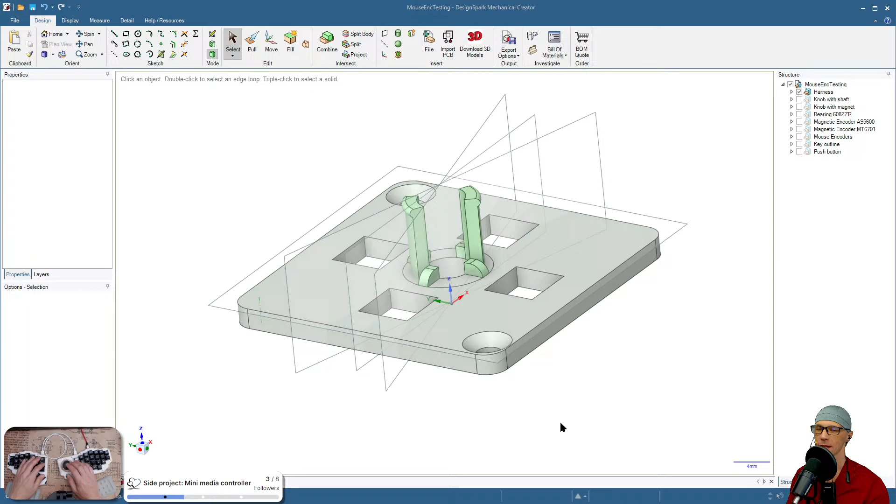Welcome everyone. I think it's gonna be kind of a tradition already, where I give you an off-stream update on what I did when I was offline.

Recently we've been working on this harness for the encoder. It looks more or less like this. Let me bring it back for you. Like the knob, and we have the bearing as well, and at the bottom we have push buttons. The bearing is transparent right now, but that shouldn't be a problem. So what we've been trying to do was find a way to be able to push those buttons with the knob.

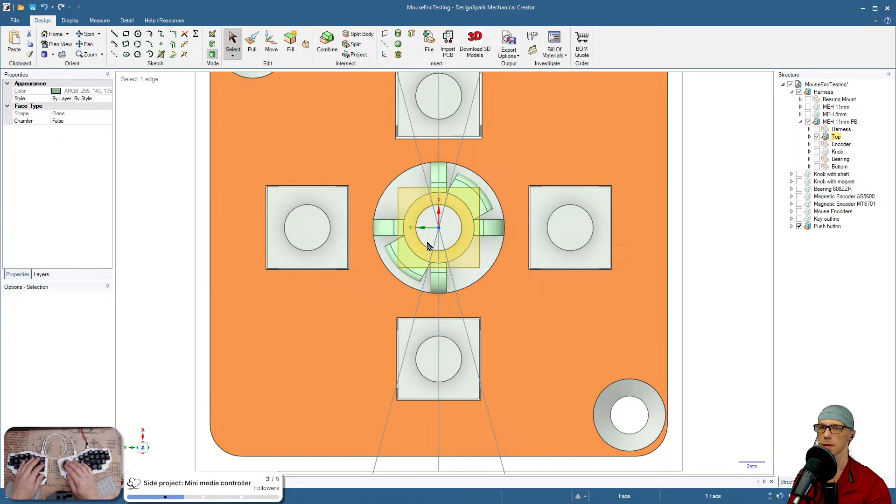Recently it didn't really work too well for us, and it's still not great, I would say. But I managed to find an okay solution. The solution is that I changed these, because before they were straight, so now I did a round edge. They are very, very small at this moment. And I also stuck to, I think, 45 degrees rotation for this part that is actually holding the bearing for us.

Maybe I can change the color of the bearing too. So don't get confused that they are a bit lower, eating into the bearing, because it turned out that this edge on the bearing, which I can change a little, is a little bit round. Maybe more like this. Something like this. I think I'll leave it like that, and I can show you later on the workbench.

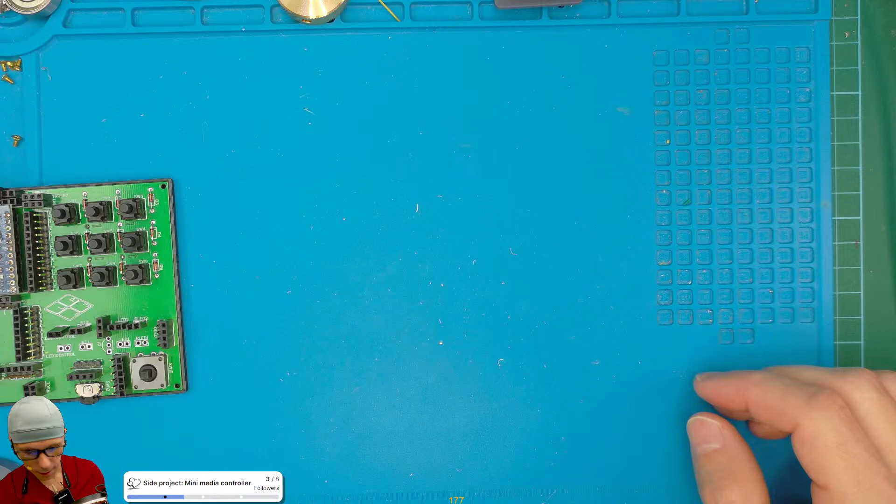So more or less, this is how it looks like now. And if we jump to the workbench, yeah, I have it over here. This is the current design so far.

So if we can manage to cram in the 5mm encoder, which is this one - so tiny I can't even see what's the size on it. Yeah, I guess this one is 5. I don't think I have any... oh no, this one is 5. Yeah, these are 5mm. So I think we can cram this one inside, and then we'll be able to use the 4th button.

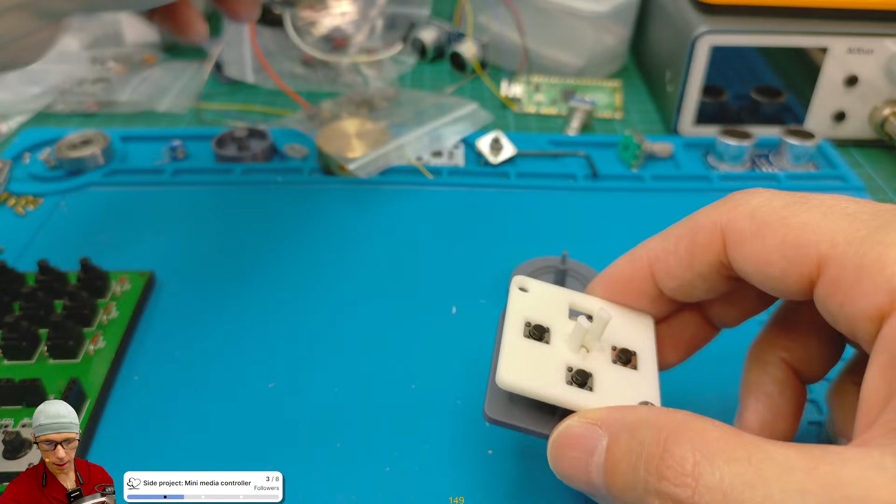Currently this kind of works, kind of doesn't. If I put it inside, I believe the issue is that the 4th button is missing over here. So it's not that good to press, but we can press it like that.

I'm not quite sure if you can hear. No, you can't hear it. So the click is not that audible. I think it's because of the encoder, but the encoder is rotating smoothly, so it's not really being held by those keys, by those switches underneath. And if we have it flat on the table, there isn't that much tactile feedback when pressing, but it's definitely pressing.

So I think we can finish this design maybe today. We can try to fit in the small encoder, add one more button, and then try to print it, and then we can see how it works. And we can save it for later, because there is one more design that I wanted to try.

I wanted to put the switch underneath the encoder, so then we'll be pressing the whole thing, the knob, together with the encoder. But that might be troublesome because it's going to be very difficult to push it with the bearing inside. So we either need a mechanism to allow the whole thing, the knob and the bearing, to be able to be pressed a little.

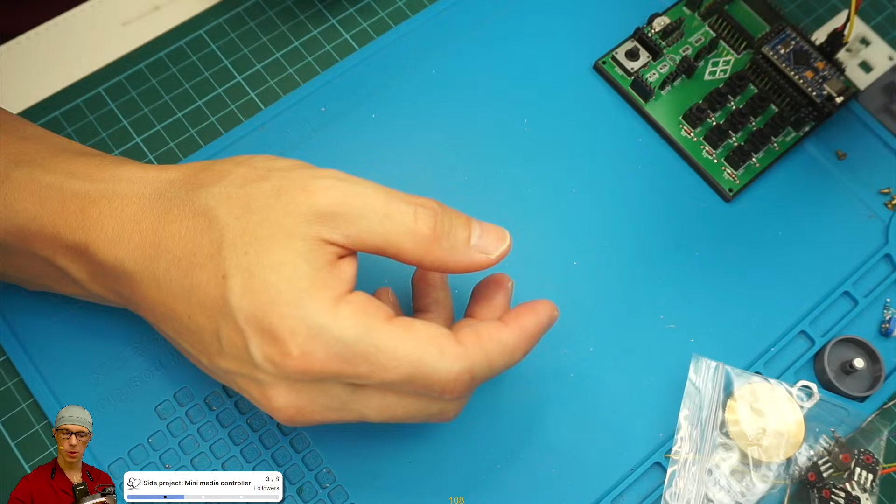On the last stream, we were trying this contraption to check how these encoders really behave in a real world scenario, like if you want to use it in a keyboard. Initially I was having issues because when going one way, either clockwise or counterclockwise, occasionally it would pick up a different key. So I changed it to output A and B when turning, and I could see a stream of A's and then occasionally a letter B. It was my fault, of course, as usual. I am the one to be blamed for this issue.

It turned out that the resolution in QMK for the encoder, you can't really change it lower to get more responses per detent. I was thinking if I change the resolution to 1, I should get an output every detent - every time I can feel the detent click, I should get an output - but that's not the case, sadly.

So we have to switch it to 4. I can show you the code.

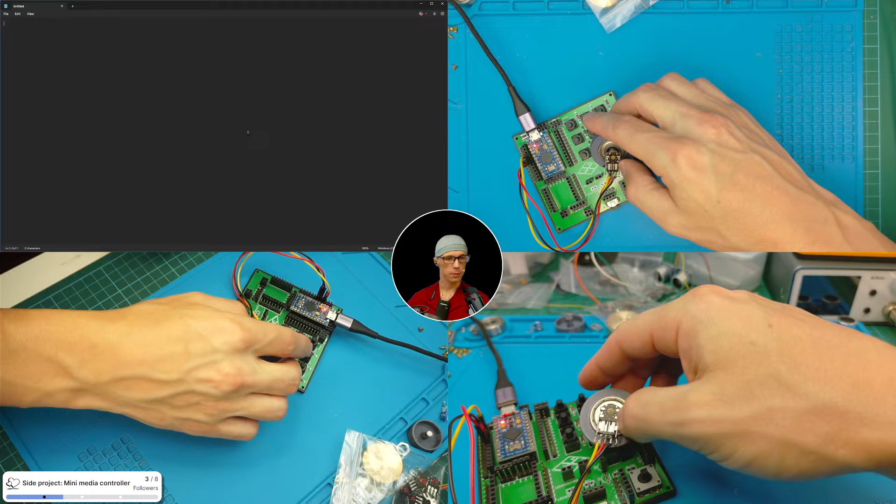Okay, so there we go. As you can see, with the resolution of 4, I have very clear output - just letter A's. Not sure if you can see it. Maybe a quick jump to...

Yeah, so as you can see, it's very nice, very responsive. But of course I don't like it like that, because there's quite a number of detents that I can feel it moved before I can see the output. So it should be 1, 2, 3, yeah, more or less 4.

Let's see when we have the output. Okay, so this is - we have B now, so it's gonna be 1, 2, 3, 4. Yeah, so I would rather have it respond to every click on the encoder.

And I actually have this done, because on all of my keyboards I am not using the default implementation from QMK regarding the encoders. I do my own reading from the pins and decoding. So I think this should work.

So first thing first, today I'm gonna dismantle one of my early prototypes. I wanted to dismantle it a long time ago after we built the keyboard on the previous stream, but then I thought maybe I should just leave it, might come in handy. And today is the day when it will actually come in handy.

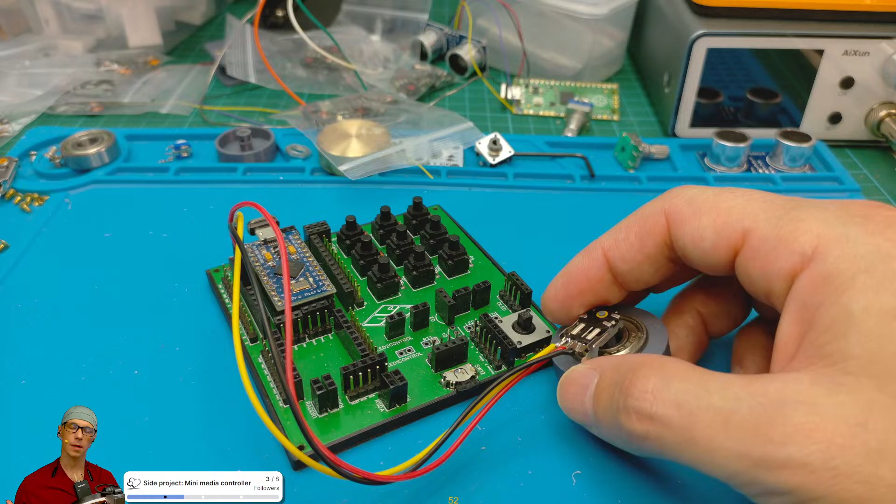So I'm gonna hook up this encoder to my old prototype, because I think the function running there that is decoding the encoder input is actually...

Okay, now I see there is some buffering error on YouTube. Oh, that is odd. Let's take a look at what's happening. Okay, that is very, very odd - I never had that before. It doesn't look like my PC is too busy with buffering. Okay, let me do a quick check if we have any output on YouTube. One more second.

Okay, seems like it's working. I'm not quite sure what's happening. What does it want from me this time?

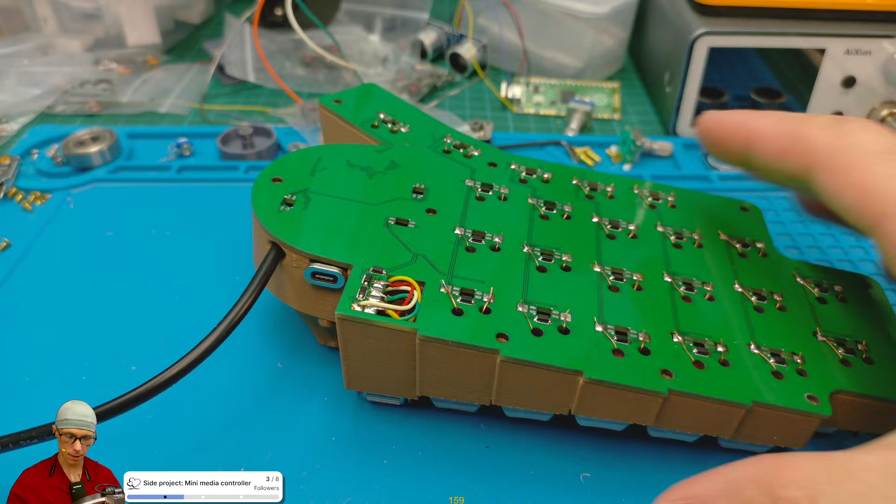So these two pins on the bottom, this is the switch, so we can skip these two. And then we have A, B, and C, and I think the last one is the common one. So we can connect the common one to our blue one, but okay, I think I will need to prepare some new wires for it.

Because over here I have these. Oh, these are good for the pin headers, and I don't really want to spoil them with solder. So yeah, let's remove this.

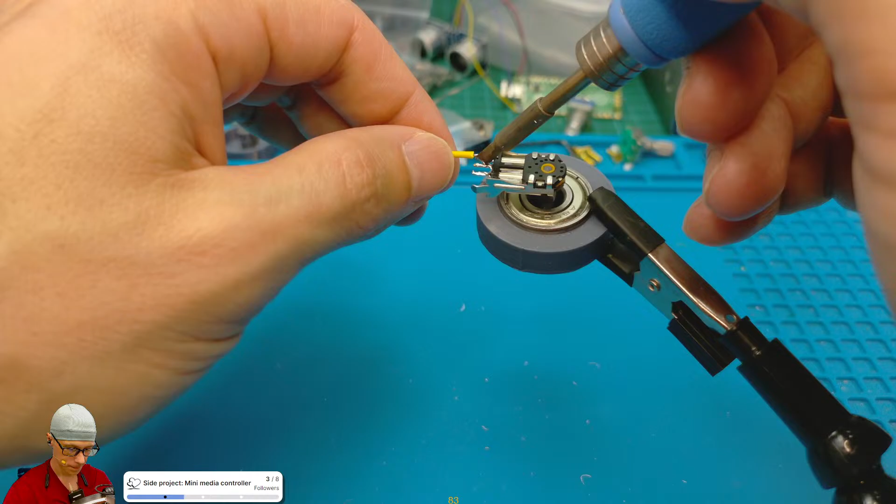At first it was difficult to solder them in, and now it's difficult to remove them. Okay, we have one off. Second one. Okay, so I need 3 wires.

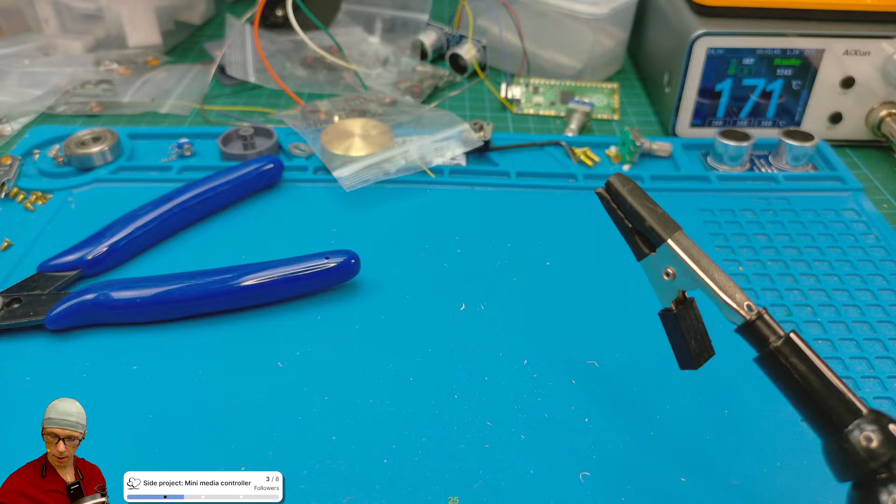So we have 2 and one more. Let's go with the orange one. Okay, let me just quickly strip them. Okay, the question is, aren't they too long a little? Yeah, maybe this one, let's trim it.

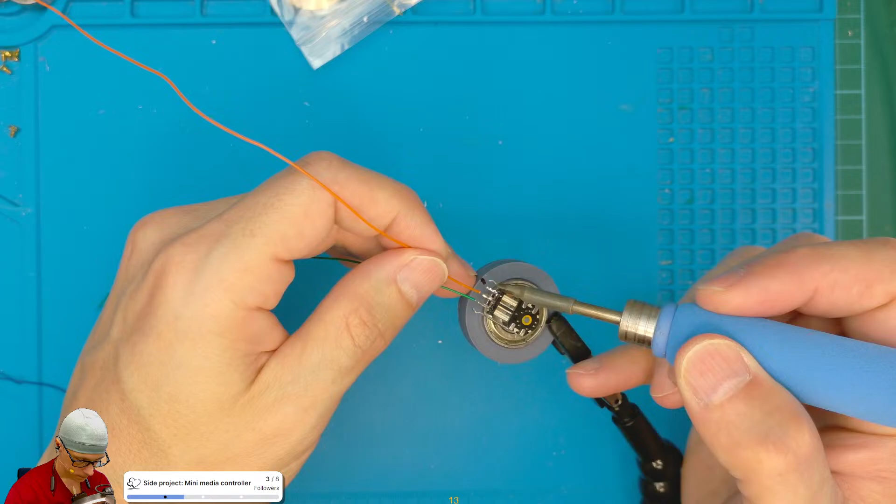Okay, so going back to our encoder, let's attach those wires. And one more left.

I hope it's gonna work the way I'm expecting it to. Okay, this one is too long.

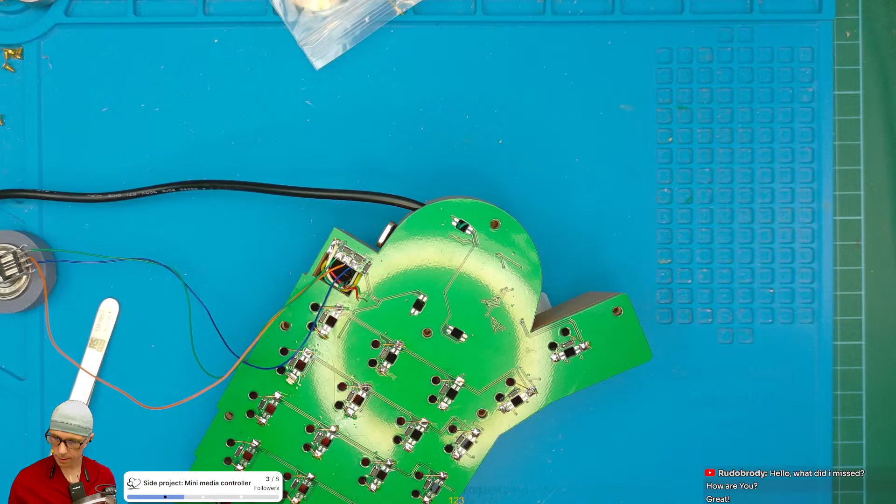And one more. Alrighty. Okay, so I think we can try to plug it in and shut down the stream, or maybe not. Let me clean this up. Well, anyways, we're gonna be scrolling, so I need a page.

I think we can use our favorite page for scrolling, which is QMK, all the key code list. That is kind of long. Okay, we might not be able to see if we have jumps, but most probably we won't. Okay, let's just plug it in. I can't wait to see what happens.

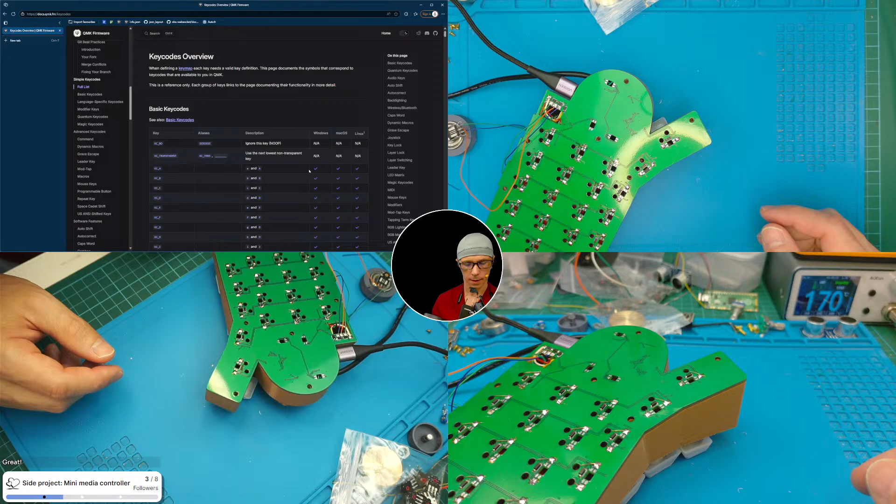Okay, stream is still on. Okay, what do we have here? Oh no, actually, it behaves the same way. So I thought I had it a different way, but still, yeah, it looks like it's every 4. 1, 2, 3, 4. Okay, so looks like I'm not doing it any different.

Okay, let's take a look at the source code. I think I should get a new window for that. Well, at least we know it's working. Oh no, it's the same source. Okay, I got it wrong as usual. Anyways, we have our matrix over here.

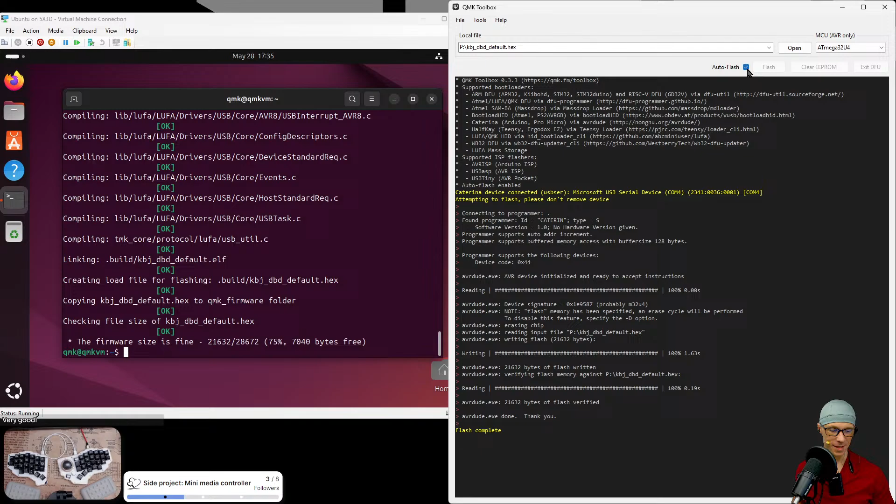It's good to have Bootmagic working, as you can see. Yeah, okay, so it's changed already. So now we have our resolution of 1. And let's take a look how it's gonna behave.

Okay, now I have a response with every step, but I don't trust it that much. I think we should change it instead of just rotate, instead of scrolling. I think I will just output A and B, and then we will have a definitive answer if it's really working, or if we have any rogue letters in our output.

So it would seem that my implementation is a little bit different. So if I change the resolution to 1, I get an output with every step. Although I don't know if it's the correct one, but it works, so I'm okay with that. At least it looks like it's working. Okay, let's take a look.

Where do I have the... I need to find my scroll.

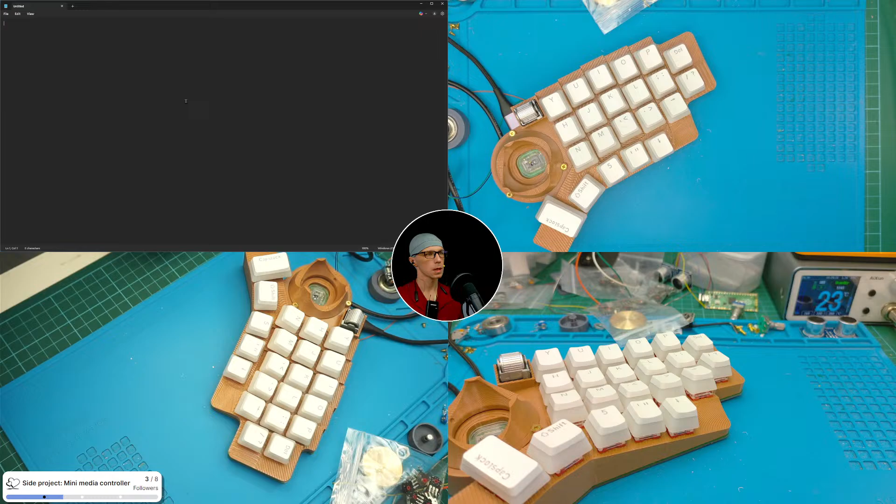I think we can go back to... can I make it bigger, maybe? Okay, doesn't look like it's zooming too much. Okay, so let's take a look. What happens now?

Yeah, perfect. So we have a clean output and no missed steps. Oh no, actually going backwards. Okay, I think it lost. Okay, it was working for a while.

Okay, it just desoldered. Okay, so that is fine. Everything is under control. Almost under control.

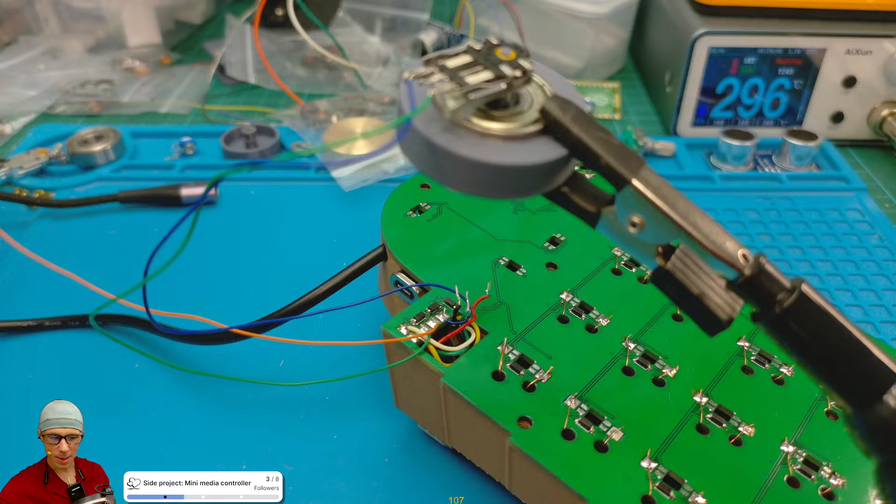So, when I noticed that we have like AB, AB, AB, I was like, oh shit, it's not working. But then I realized that the wire just detached. Maybe we can give it some more juice to hold on to.

I think it's a little bit too long. I will just trim it a little. This wire is like sticking out quite a lot.

Okay, now it should hold, at least for a while. Oh, I also detached it from the keyboard itself. Oh wow, that is actually a disaster, to be honest.

At first I was thinking yesterday maybe I should just use Chordie, or just copy some code from Chordie to be able to check, but then it was already too late to do this much. And then I realized I don't need to really copy anything. I can use my old keyboard for that. Just swap the encoder for this one, like so, and then we can play with it without putting too much effort.

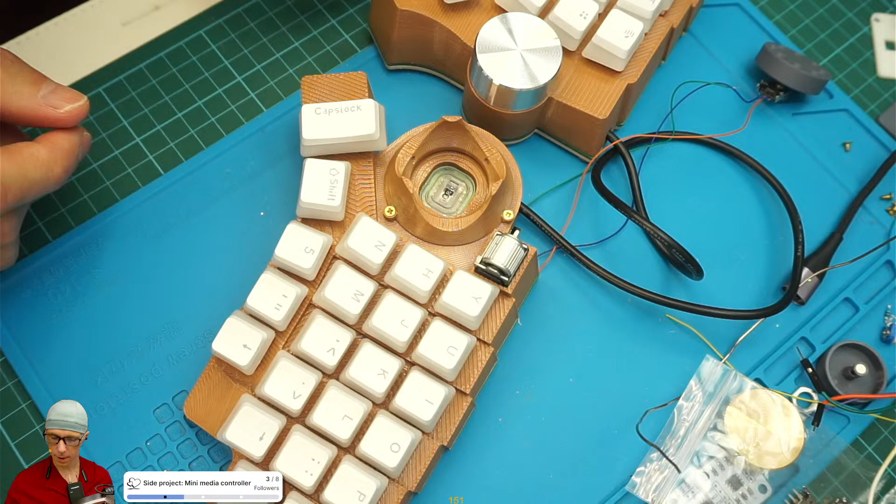As you can see, it's very messy. I can't really have it upside down because it would be pressing some other keys. Yeah. And I think I need to have it like this. Okay, are we still on the... okay, let's do a split, or maybe...

Shit, another cable just disconnected. Holy, damn it. That is really sloppy soldering, it would seem so.

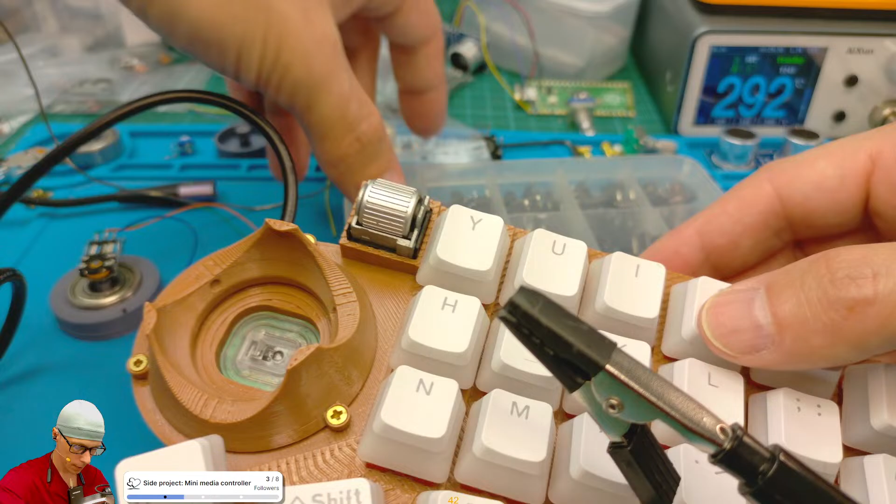Okay, I hope that it will hold this time. Okay, I guess we are on.

Okay, so it's not all sunshine and rainbows because... oh, so no. Okay, now it's okay. I don't really know if there are some wires touching or what.

So if I go too fast, it will kind of lose. Okay, well, I guess we are bound to... let's change it to 4. Let's see what happens if we are on resolution 4. So maybe my implementation is not that much different. Where are we? Over here.

Can we pull them up now somehow? Technically we could. I do have some resistors and we can just plug them in... that might be tricky actually. Okay, give me a sec, I will just grab the resistors. Yeah, I think I can remove that for now.

Okay, so we need 5K. That's gonna take a while. Oh, we have 5.1. Okay, that's good enough.

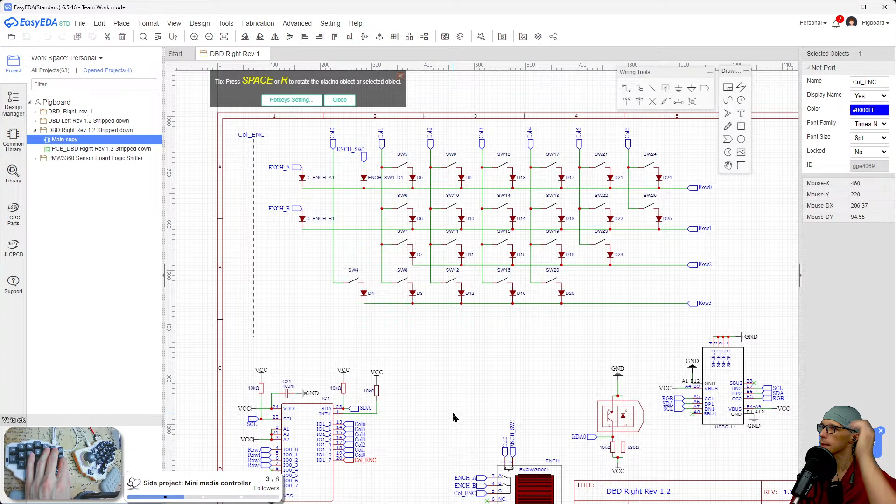So this won't really help us pulling those up. There's no point because they are most probably up already, or maybe down. And I think the column goes up. And where do we have the switch actually? Oh yeah, okay, so it's being read from the row. So that's not gonna help.

So I guess we are stuck with this for now. Well, at least we know it works. So that was a waste of time looking for those resistors. Okay, one more test before we go.

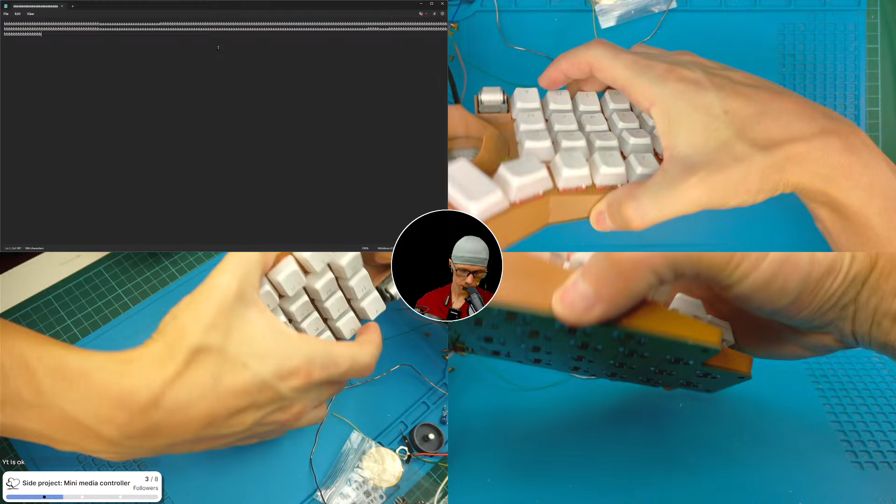Okay, now it stopped working. Okay, so one key is missing. I mean, one wire.

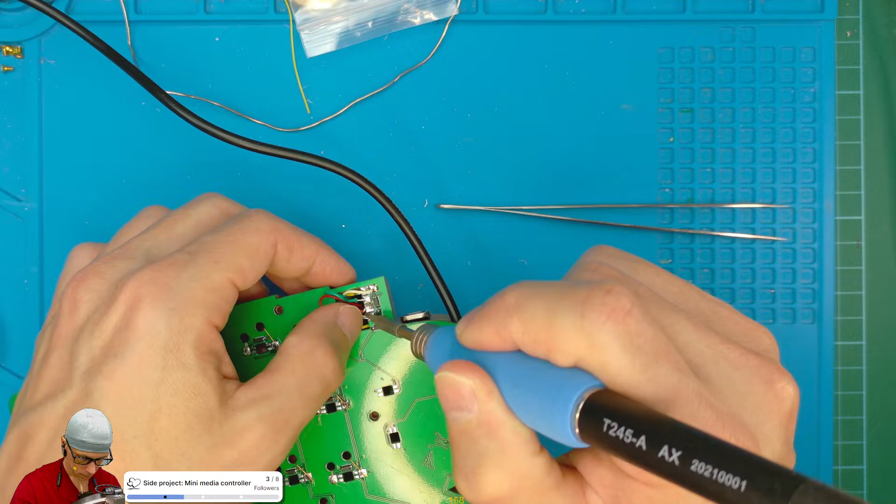Okay, we have it back. Maybe I should try if it even works. I'm under the impression that if I connect this keyboard, then it starts complaining. I mean, the YouTube starts complaining.

And I got it wrong. Of course I got it wrong. So we have only one way rotation. Okay, red is at the bottom. Okay, so I need to swap these two, three wires, and I can't even remember how to put them. But I guess it's not only my issue.

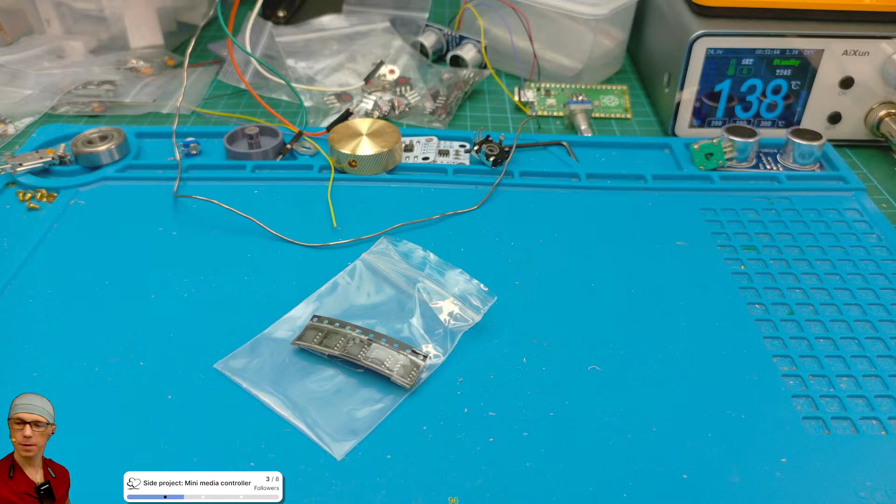Okay, going back, I also received one of those magnetic encoders I was talking about. I think the name is MT6701. I was expecting them to be a little bit bigger, maybe to hand wire, because from what I remember, if we can take a look at the schematic... 6701. Do we have a data sheet somewhere for this thing?

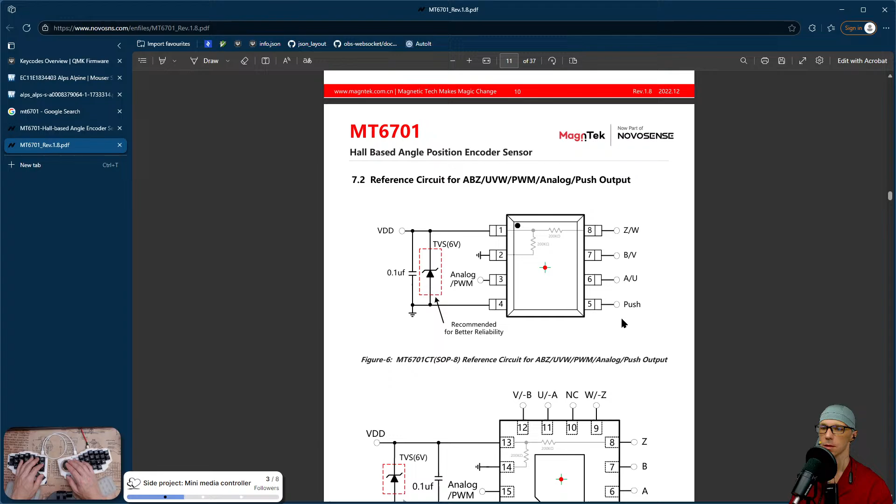Oh yes, there is. So this one had the output I was very interested in, which was ABZ. Okay, this one. Actually it has two types of outputs, ABZ and UVW. So looking at the schematic, how to make it work, we only need a capacitor, but I was thinking maybe we can skip it. This diode is only recommended, so we're not gonna bother with it since it's only recommended.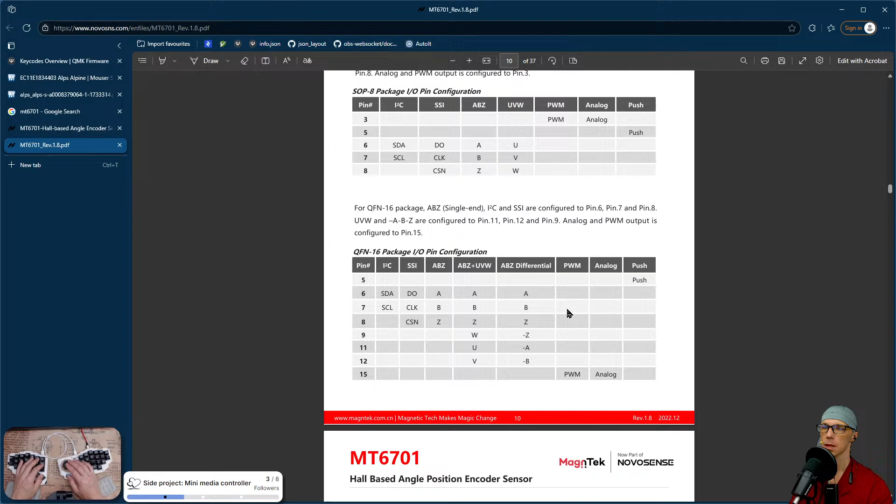Yeah, but I was looking at this and it looks kind of normal. So we would be interested in A and B output. And I was curious, can we really read anything out of it just by trying to read those two inputs, without any configuration or anything? So which are the outputs? 6, 7 - actually we are interested in 6 and 7 only. Okay, so that will be this one, these two.

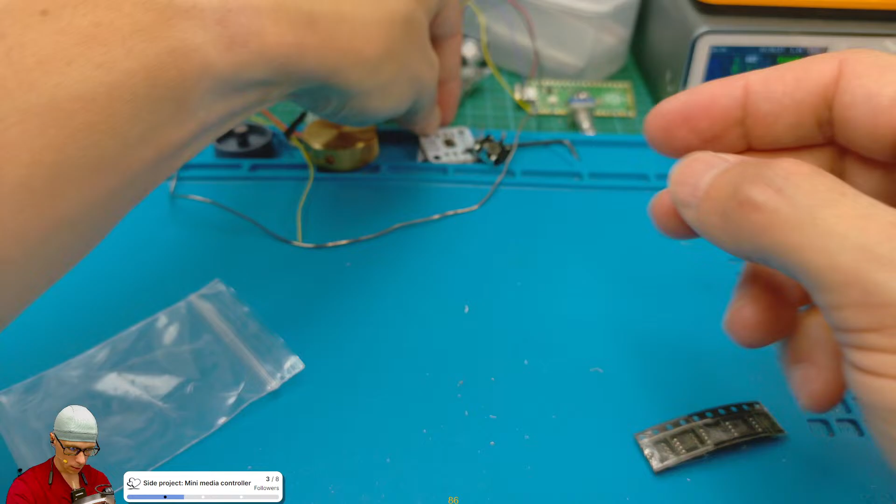Yeah, but I think it's gonna be very difficult to solder by hand, because it's so tiny. I guess we have to wait, because I also have the same chip but on a PCB, something like this, but with a different chip. So I think we will wait for that. This one maybe we can try - if we happen to know it really works, then maybe we can try to squeeze it into our horizontal encoder later on. If we can hand wire it, it's gonna be super difficult most probably. If it had just a little bit bigger package - I think this one is SOIC8 - if it was just a little bit bigger, like the encoders we had before, it might have been a little bit better.

Okay, so what is left today to do? We can either try to remodel this one, so we can fit a 5mm encoder inside. And we can also try... okay, where was it? Okay, I have the encoders over here. Oh, they're also small. Which one is smaller? Okay, this one seems to be smaller. Is there any? Okay, this one is 7, and I think this one is 5. Yeah, these are 5. So I think we'll try to redesign this so we can fit in one more push button over here, with this encoder, and see if it works. And then we can also focus on trying to make it work if we put the push button underneath over here, so then we can have only one button, but that will be kind of enough.

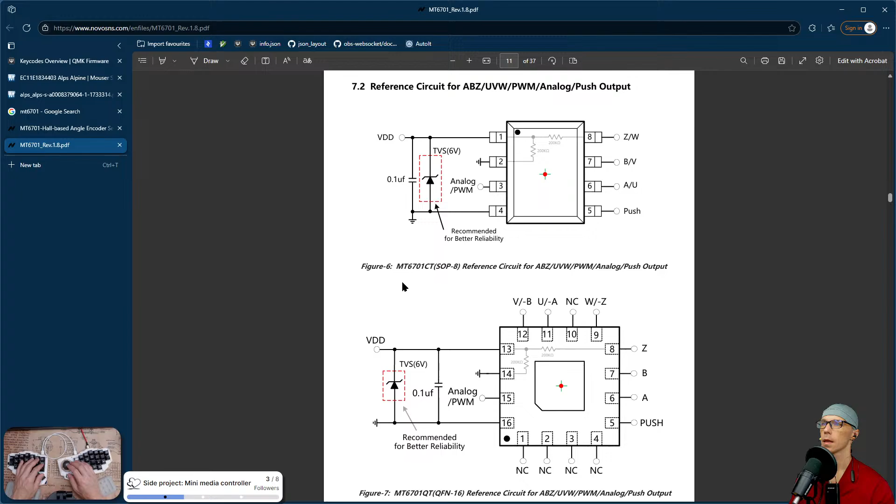Okay, so I guess we can jump into the CAD for now. Or can we? Let's do some cleanup on the desktop.

Oh, I forgot to reprogram it, so instead of scrolling, I'll have A and B still. But that's fine, I don't think I'll be using it anyway anytime soon, so I guess I can just close that.

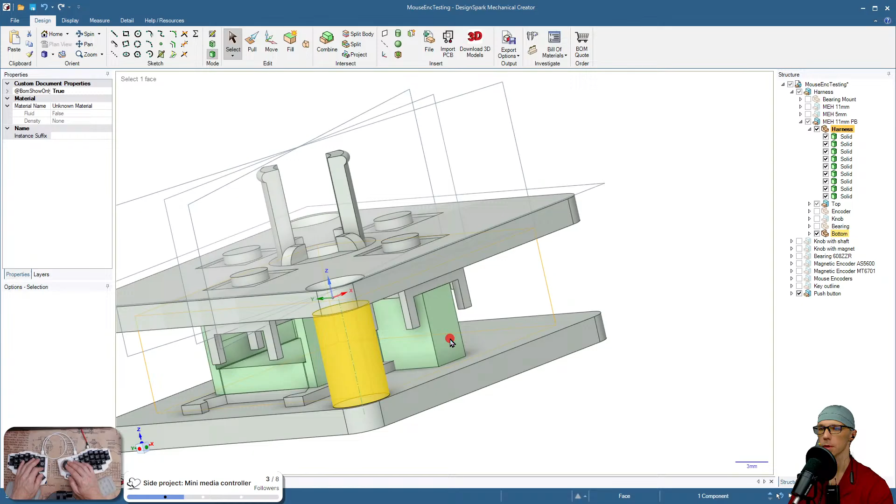Okay, so where were we? So this is our bottom part. Let's make it more colorful. Okay, so we'll be working on this part, on harness. So what I need is one more support. I think I should.

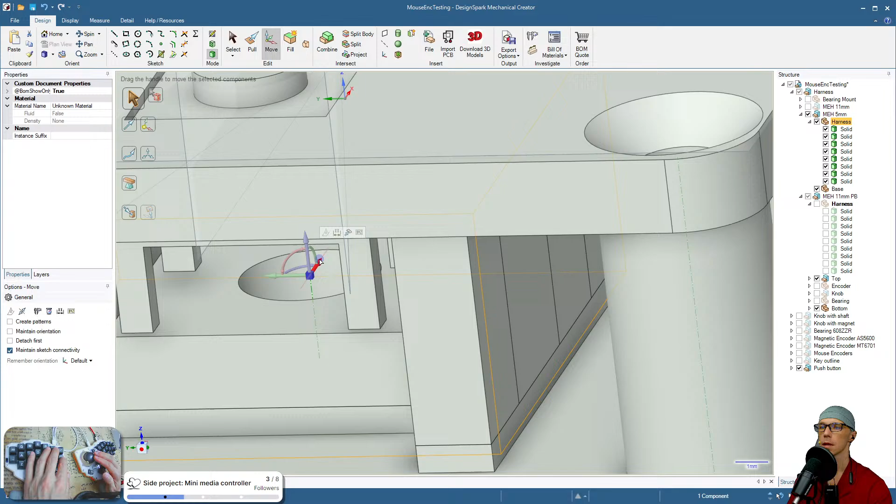Okay, let's take a look, because I see that we have something done over here. Okay, looks like we have something done. Okay, so if I can just move it and align the hole from here to the top. One more try - so like this, and I want to align. Okay, looks like we should have enough space. It looks like it's aligned. Let's take a look. Yeah. Okay, seems fine. Most probably it's not fine, but that's fine.

Okay, so let's take a look. Let's just remove the top from here. Okay, so this push button is over here. This part, I think I can hide it. Okay. So I should either pull this to here.

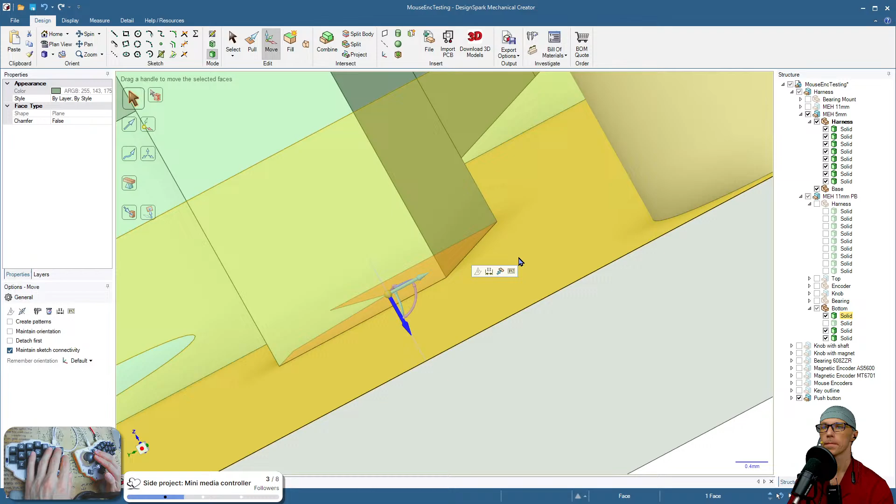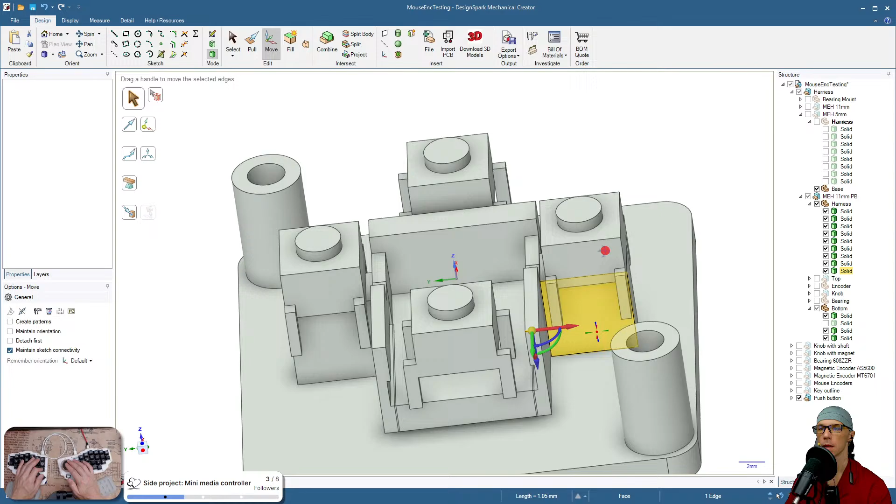Okay. So looks fine, but these walls are kind of too thick. If I can compare with this one, okay, so we can make them smaller. I see this one is still kind of - I left it very thick. What's the thickness of this? 1.05 - oh, that's kind of low. Yeah, but it holds anyway. So let's make this one the same, 1.05. And let's move this over here closer. So this is like a spot that the push button is resting on.

Okay, and I guess this is just one more wall left for us.

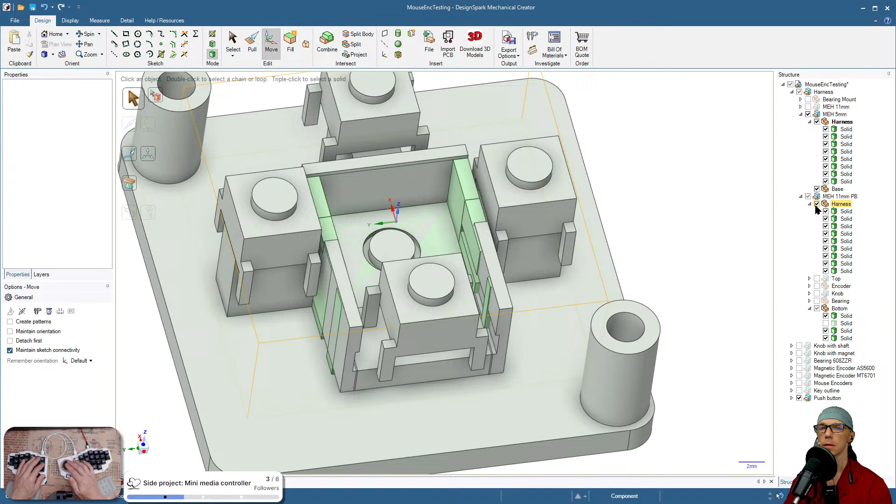So, okay. We went a little bit too short. Oh, that is fine actually. We don't really need those because I think we're still gonna have to chop off the legs from the encoder anyway.

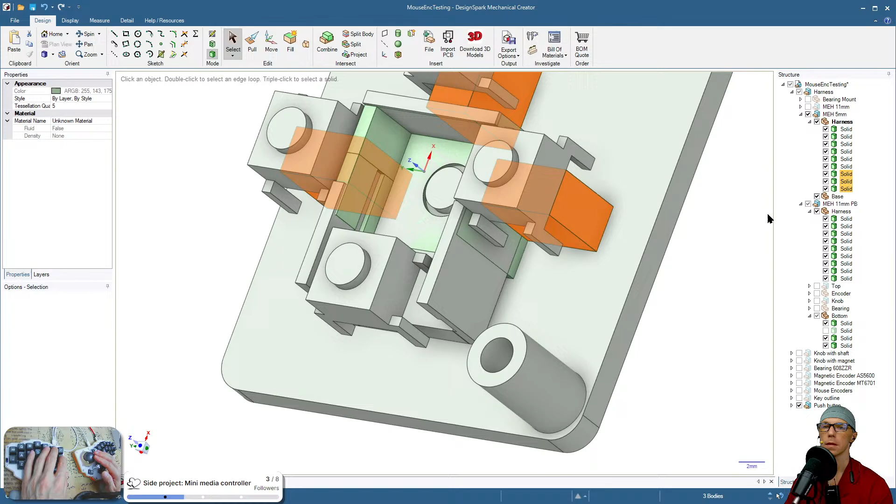Okay, so I will just borrow these four, so we don't have to use this one when we are printing. And...

Like this, I will copy and paste this one, and then I can rotate it around the center, like so. So if I make it 90, okay, minus 90.

Okay, is it in the center of this switch? We can quickly check. Yeah, it looks like it's in the center.

I think I will leave some space over here. Let's take a look at the... Do we have an encoder prepared somewhere that is 5 millimeters? Do we have a mock-up anywhere? Yeah, we do. Okay, if I can move it.

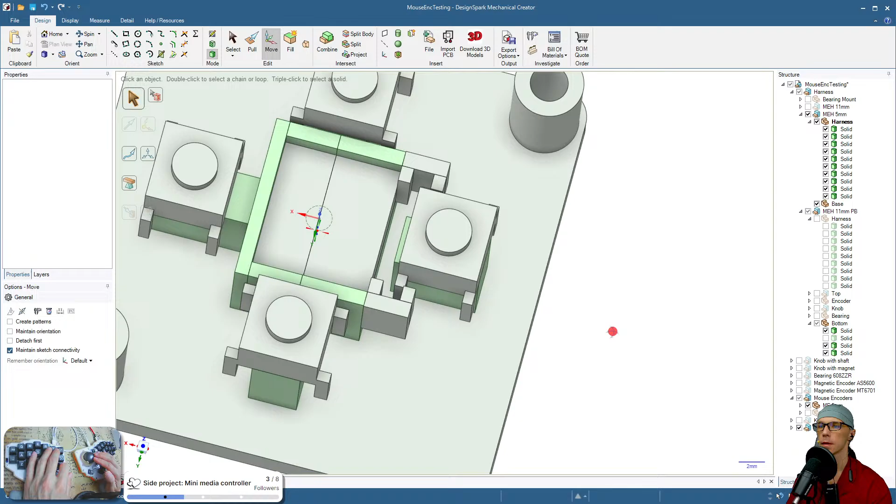Okay, there is a slight chance that if we chop off the legs, it might fit.

Okay, so for the 5 millimeters, we still need to... or maybe I will just borrow the top from this one. Oh, there's too many. Okay, we need only this one and the top itself.

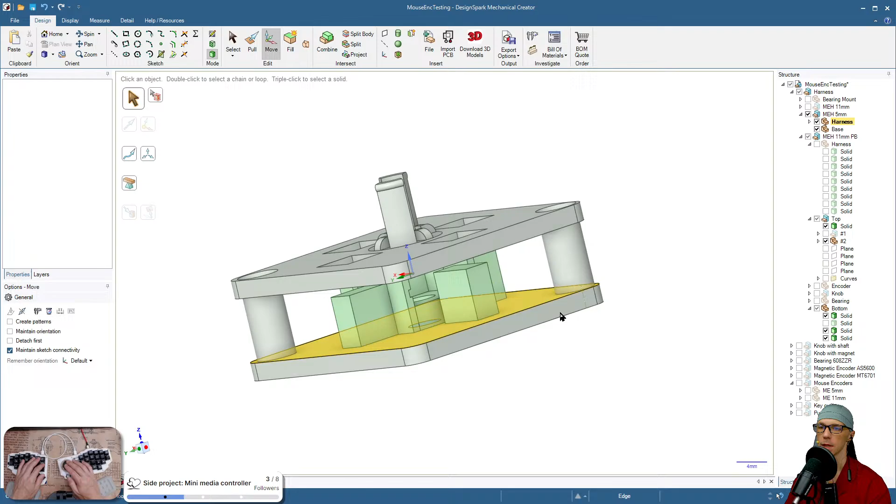Okay, I can hide the push buttons everywhere, and we can also hide our encoder. Okay, so the bottom we have already printed out, so that is fine. We don't need that. Oh, actually, no, we do, because we don't have this. Okay, forgot already about it. So I think we have to print both those parts.

So, well, actually, no, well, I was right. We do have one part. We have the top ready. This part is over here. So this one is fine, so we can skip this part. So we don't need the top, but we need the bottom.

Okay, we need this, and without this part. Okay, so far it looks good, if it only fits.

Let's make it push button bottom, and this one is 5 millimeters. Okay, and I think we can send it to print.

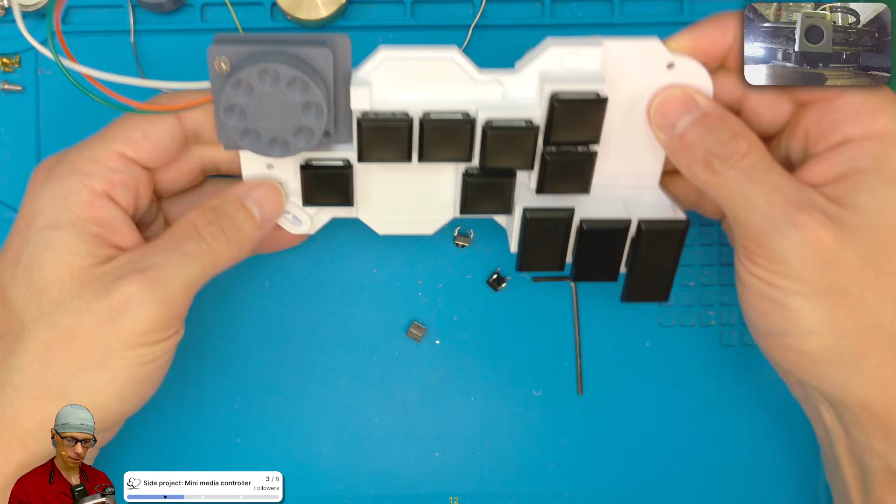So when I look at it, I mean, it looks kind of okay, but then at the same time it looks kind of big. If you look at it, I'm not that much happy with it. I mean, initially it looked fine, but now, yeah, I'm having second thoughts if it should go like this.

Maybe we should just stick to the volume with this one, and we should maybe try to do something with the horizontal one, so we can look at it in CAD in a while. But first, I guess I would just dismantle this thing and desolder those wires.

Need to do some cleanup on the desk. Too much stuff lying around.

The horizontal one, if you can make it small so that it would fit into one key, I think that would be better. I mean, I like this one, I like how smooth it is and how easy it is to rotate, and scrolling would be nice, but if you look at it, how much space does it occupy? I am a little bit less happy.

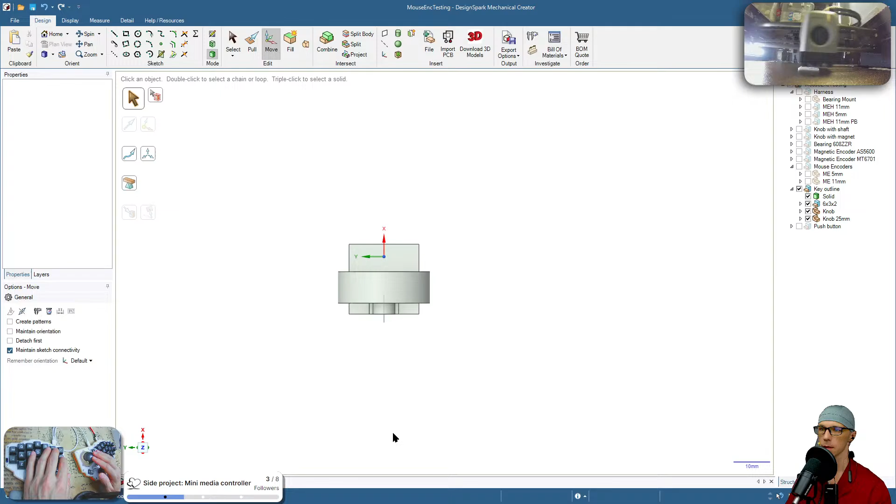Okay, what have we done so far? Not much from what I can see. Okay, so I think I'll have to move the harness to here.

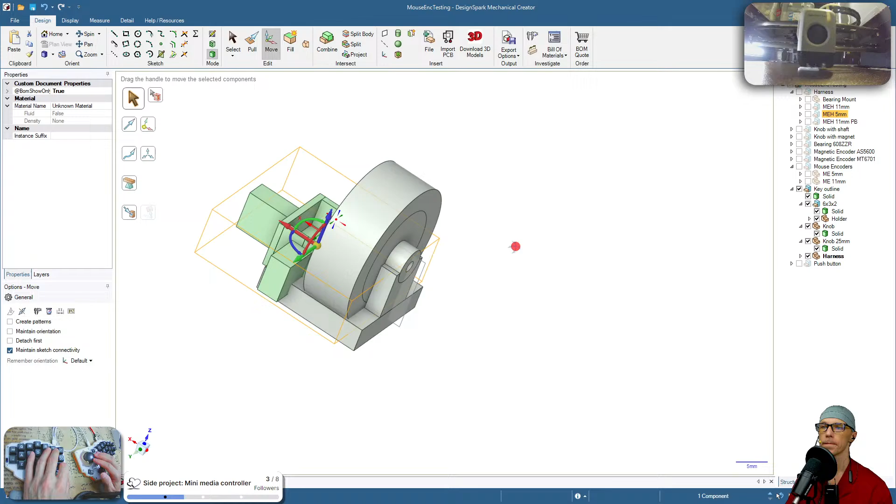Okay, we have a few elements too many because we won't be needing these for the push buttons, so I'm gonna just remove that. There's one more somewhere hiding. Okay, this one. So now I need to rotate. I think it should be minus 90. Okay, looks okay.

So now we have to align this with our shaft over here. Yeah, with the 25 millimeter knob, it looks okay. With the smaller knob, oh, with this one should be good as well. How big is it actually?

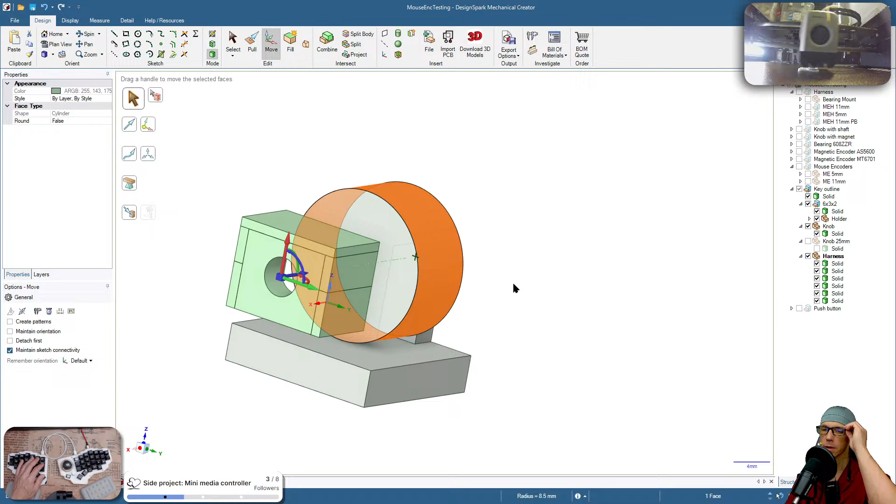Radius is 8.5, so it's gonna be 15. Oh, maybe something, if we had something like, yes, am I correct? 8 and 8. No, it's 17 actually. 16, yeah, 17. If we had something like 20, maybe that would be a good middle ground between 25 and 17.

Actually, it should be lower. Should be over here. So let's copy and paste, get rid of this one. Okay, so it has to be 10 then, right? If we want it to be 20.

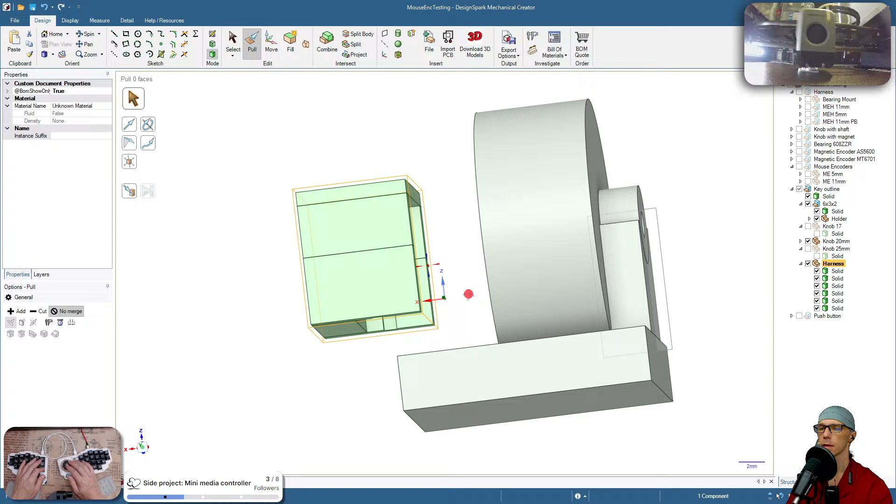Okay, so let's move the harness. Yeah, I'm also curious, how deep does it have to be? I think we can trim it. Like, if we take a look, there is quite some space.

So we can go as low. Okay, but can we? How are we gonna put it inside? Well, no, not quite, because we need something to hold it. But there are those. Okay, I think we need to print it first and see how it goes.

I think that would be better if we do it like this. So okay, let me just move the whole piece. Okay, so I want it to be, okay, if I make it like 0.8, what did I move?

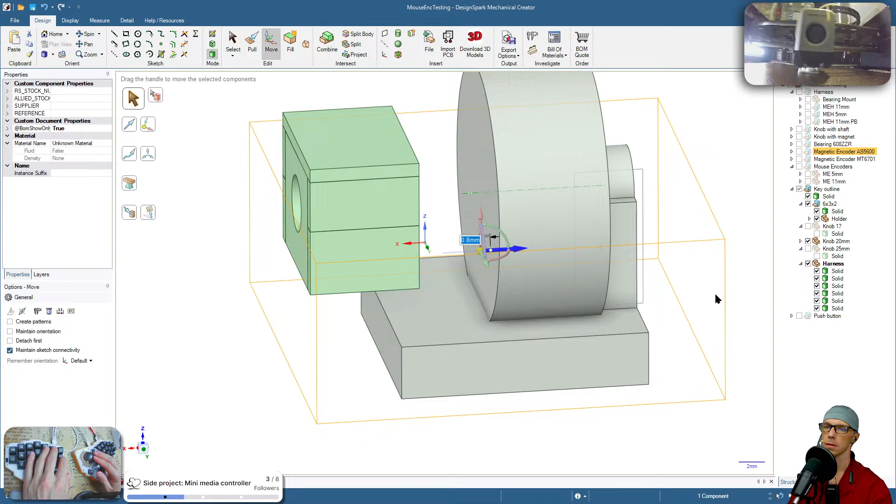Okay, the first question is, okay, so it's still too thick. How thick is this one? What's the size of this thing? Okay, 8.5, 855.

Was it taken from any of our encoders before? I mean, any of the knobs that we've been using before? If I can find any. Yeah, so we have the big one. Well, actually, that one wasn't that bad, to be honest.

Okay, it's not here. Okay, I think I found it. I doubt any of them will be 8 millimeters tall. Yeah, this one is 15. And this one's probably, yeah, same.

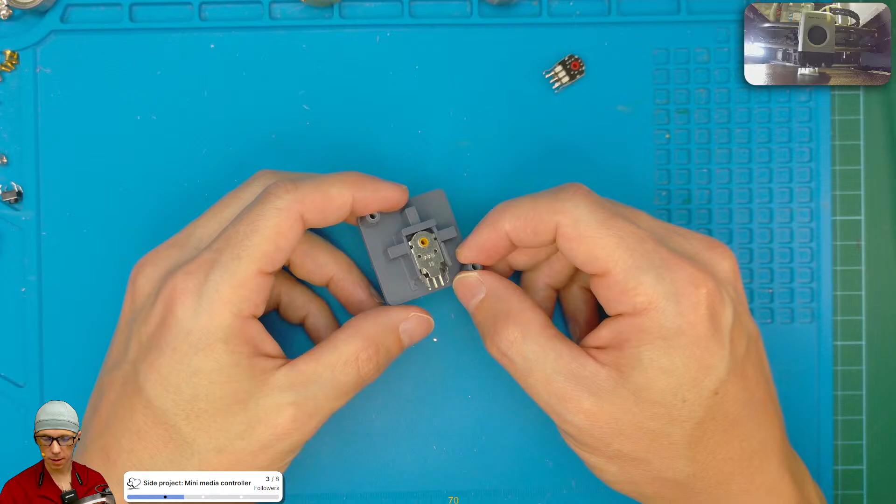This one is 8, this one is 5. Oh, and by accident I also found the missing magnet from one of those magnetic encoders. They always come with a magnet, so one went missing, and miraculously today I found it.

So we can prepare our 5mm. I think the print is almost done. Yeah, it's done. Okay, I'll try to rip it off the build plate while it's hot. I'll be right back.

Okay, fresh off the build plate. Let's see what our options are. Oh, looks like we have to cut the legs completely off. Okay, if I try to bend them.

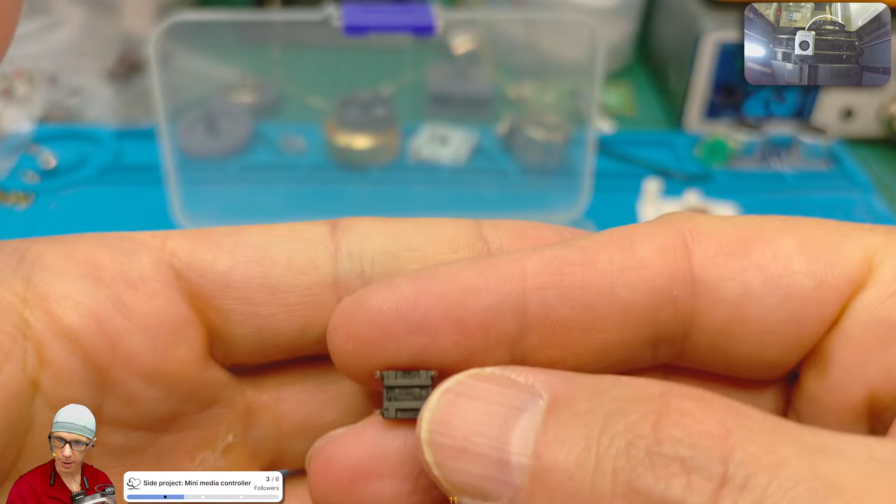And this might be the one that I'm looking for. Yep, 4.9. Okay, so this one has no markings on the bottom. I mean, doesn't say any A or anything like that. It's just like this. So this one is 4.9, and the one that has this one says something A something. In the center it says A15. So this one is smaller. Anyway.

So we have our bottom part, we have our switches.

Okay, and now I'll try to put on the top without messing up all the buttons. Okay, where's the screw?

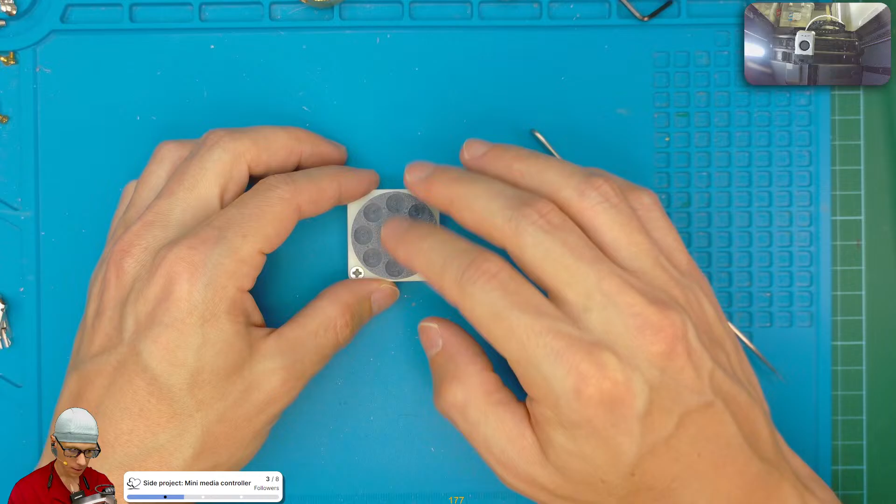Okay, I have a good visual from the bottom. Okay, let's take a look. Okay, it's moving around. Yeah, we have such a good click because the encoder is moving left and right. So we have enough space, but rotating around is very wobbly.

Okay, but we are onto something. Well, actually, it's not that wobbly. Like when I rotate, just a little bit. No, it's not acceptable. So we definitely need to tighten the bottom.

Okay, so what was it, how big was it? 4.9. Or was it? 9.65, 9.6. So we should make it like 9.7.

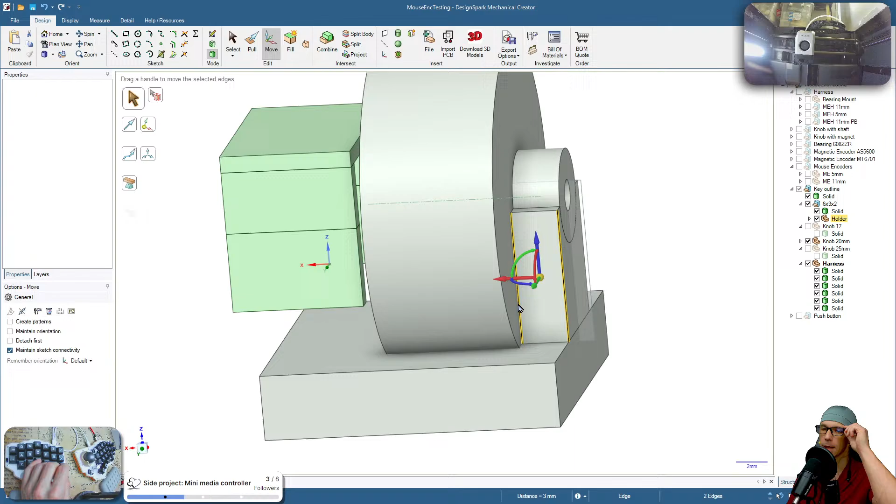And how was the distance from here to here? Okay, this one is 3 millimeters. So I don't think we can cut anything from here. Also, I'm not quite sure if just 8.5 millimeters will be enough for the knob to rotate. We can test that sometime later.

Okay, so let's go back and make it 1U, because this is like one key size. It's gonna be demanding to fit everything into one key. Maybe we can make it. If not, then we can maybe extend to 1.5. It's not that big, 1.25 normal length of the key. So it's gonna be something like...

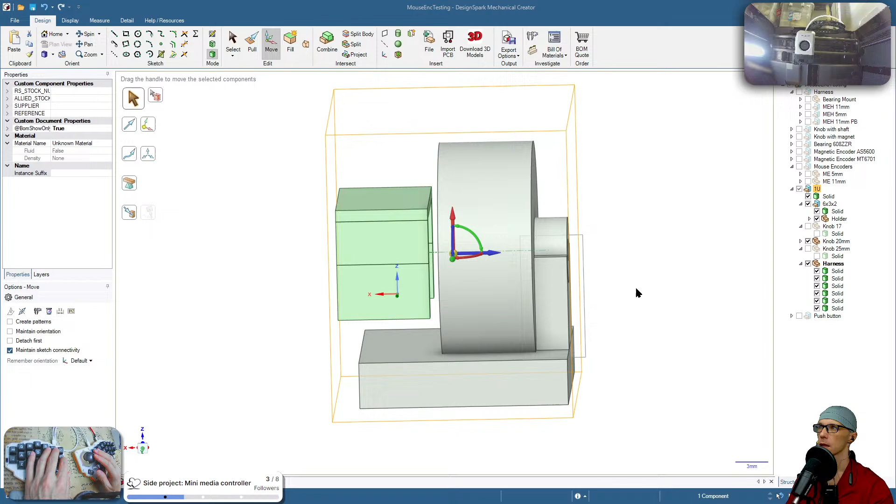19.05 times 1.25, and I don't know because it just vanished. Okay, it's gonna be 23.8. So 1.25 is not actually that bad, it's something I think we can deal with. Yeah, it's almost 24 millimeters.

So we would have extra 2 millimeters from here. Well, it's still not that much actually. It sounds like it's a lot, but it's really not.

Okay, let's go back to our previous design. So we are here, and that one was 9.6, so I said 9.7. So from here to the center, we want 9.7 by 2, 4.85. Okay, so...

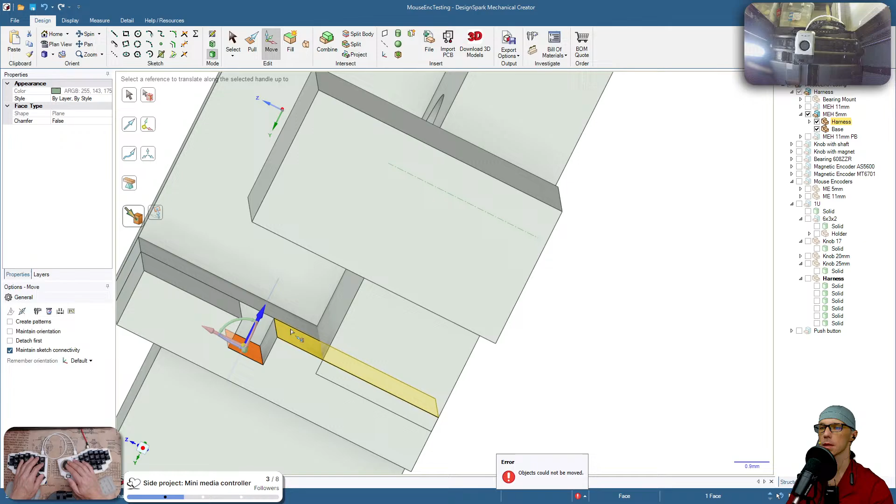4.85, and we can move this one as well. Actually, we won't be needing this, as I said this encoder doesn't have that. Okay, for some reason I can't move it, probably because of this. Okay, now it should allow me. Okay, I can fill this and fill this. Okay.

Okay, so this should technically hold it, but let's take a look at the original one. And maybe we can bring this as well. So I will just copy this and paste it over here.

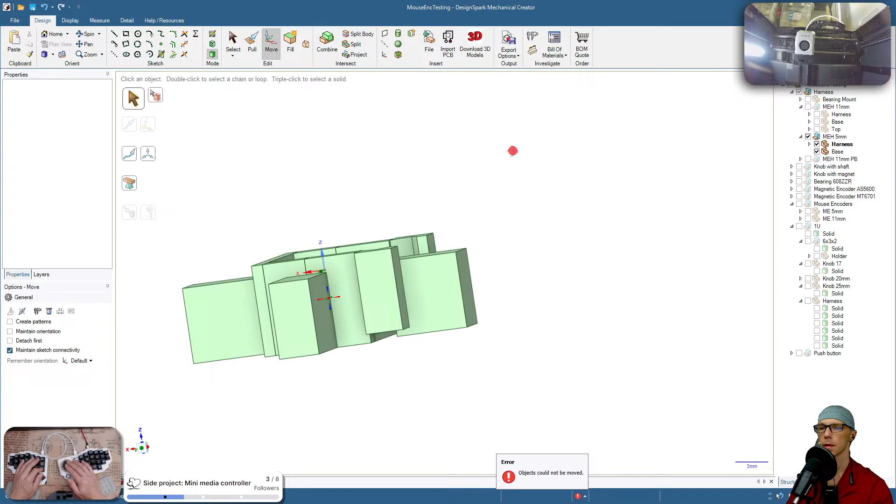Okay, so we have everything on one level right now, and this should help us to maybe lock the legs, this thing, the things on the side. Maybe this will help to have a good hold. Alrighty, so we have that.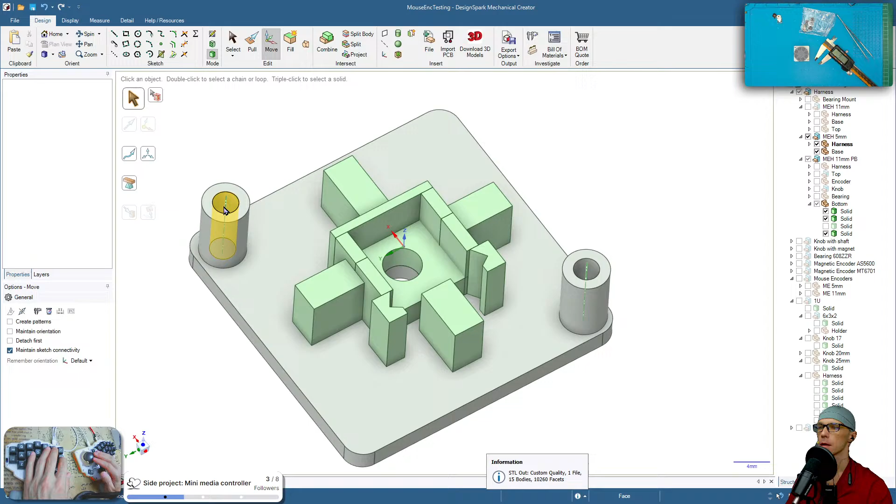Okay, I think I'm gonna at least send it to print. I'm not quite sure if we can finish today with this one, but let's see how it goes. Worth starting anyway.

Okay, so we have our model updated, and let's go and print. Okay, I'll be right back. I need to check the print bed.

I always forget to remove the priming line that it makes at the start on the edge, but this time I didn't.

Okay, so while it's doing something, I'm not quite sure if we can finish on this stream, but let's take a look first. Before we finish for today, let's take a look on this 1U encoder.

So we have our bottom, we have the harness, and we have the knob. Okay, so it looks like this.

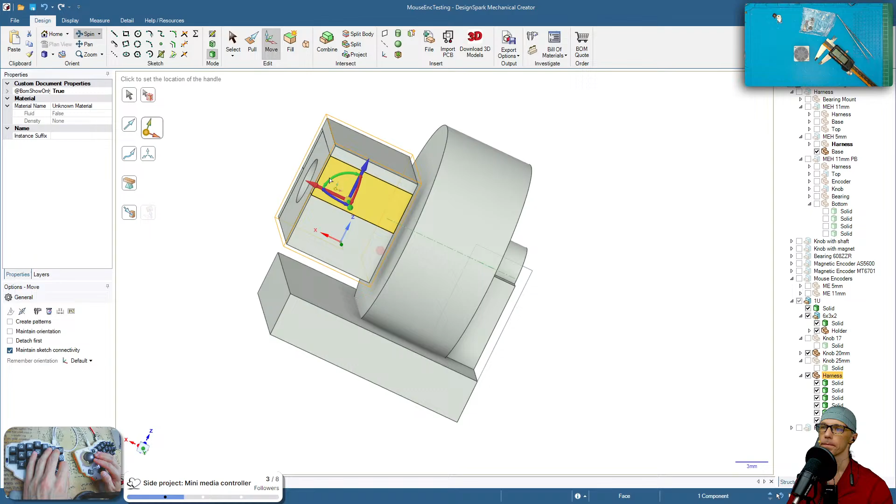So if you want to fit into 1U, we would have to move the harness quite a lot actually. Yeah, like so. And now if we want to have like maybe 0.6 at least space.

So what will be the thickness of the knob? 7 millimeters. So that is not much. That might be not enough to rotate it at all.

Yeah, but we still need to wait on this. I don't have these bearings yet. So we are kind of like locked down anyway.

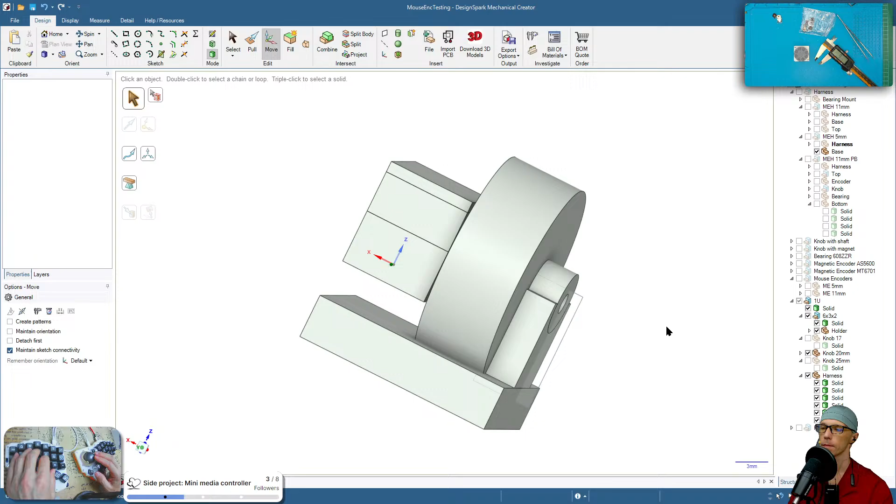Okay, so we have this one printing. Okay, I guess that will be it for today.

We have the print running. We don't really have much possibilities right now to deal with this one. I need those parts to be able to tell if it's gonna fit or not. Most probably it won't, you won't be able to fit into one key.

So today we managed at least to figure out that we can use those mouse encoders, no problems, with QMK, with this default resolution of 4. So that is good for us.

And we also have this done in a way. Yeah, we can still, in the next stream, maybe I will prepare off stream, or maybe we'll work on it. I will redesign this to fit the small one, the 5 millimeters from Kailh, the small encoder, because we need more space. Well actually it already is 5, but it's moving, so we definitely need to make it.

We need to make it more stable. So that's what is printing right now, and we still need to check if we can have the push button underneath somehow.